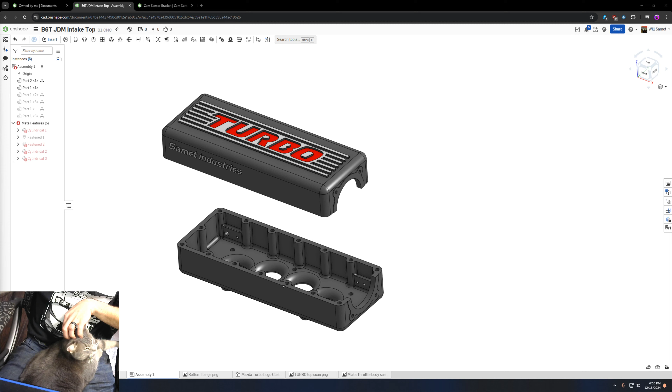What you guys can't see is just off screen... hang on, I gotta be able to see my own camera in real time here. What you guys can't see is just off screen, I have my kitty. Say... Salem. Hey. Where you doing, kitty? I have the heater on here. She loves the heater. So, oh, there's the purr. That's a good kitty. Oh yeah, look at the camera. So yep, we got Salem in here hanging out with us, along with all of you lovely people watching this on YouTube. Keep my face down here in the corner.

We'll go back to the actual part here. So there is my intake design. This is what we'll be editing today. We are looking to fit in our fancy dual sensor MAP and IAT sensor, which is over here.

So this is what we were talking about in the garage earlier. There is our sensor. This is a Bosch all-in-one manifold pressure and intake air temp sensor. It simply requires a hole to be inserted into and then a spot for us to secure it with a bolt, and that'll go inside this intake design somewhere.

For those who missed the stream in the garage, we were talking about the intake design. So here is the printed version. Switch back to my self-view screen here.

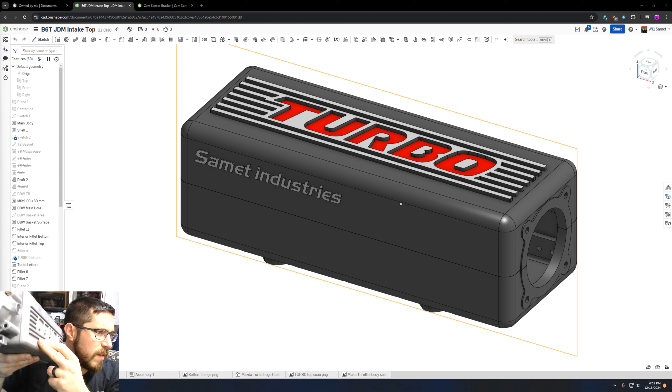So there are already holes. So there's the intake manifold printed. So that's what you're seeing on screen. You're seeing a 3D model of this. And then in my hand here, I have a 3D printed version of that same thing with our throttle body attached to it. On the back side, we have some ports available for vacuum reference.

So that is the thicker one that you run back to... sorry, I'm mirrored here. That's the thicker one that you run over to your brake booster. A small one for standard vacuum line for things like vacuum reference for the ECU or for the fuel pressure regulator. And then on the mirrored side, 3 more smaller ones for any other vacuum accessories you might need to add, like the factory distributor, vacuum for people still running the factory distributor, extra vacuum reference for any accessories that are vacuum driven, stuff like that.

There are other things you might need vacuum for. I thought, let's plan ahead and put in more ports we need.

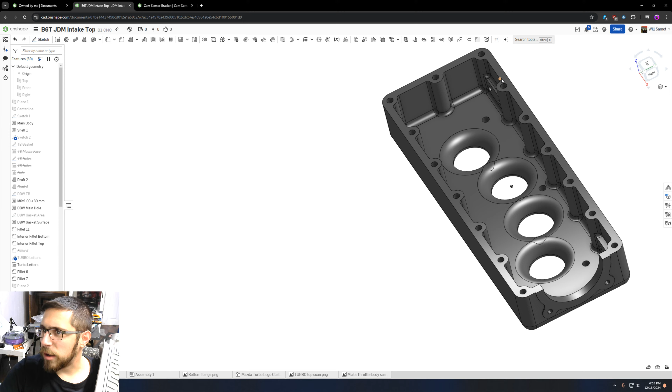So if we go to the model, I will open it up for you guys. And you can see there are those ports that we were talking about. So there's the big one and the small ones. You can see I've made this spot extra thick compared to the standard part. That way we could fully insert a vacuum port and not risk cracking it or having too thin of a wall. I made the walls nice and thick in those spots.

So basically what we want to do is probably move these components over or duplicate this whole thing on this side. That way we can still have our big vacuum port for our brake booster.

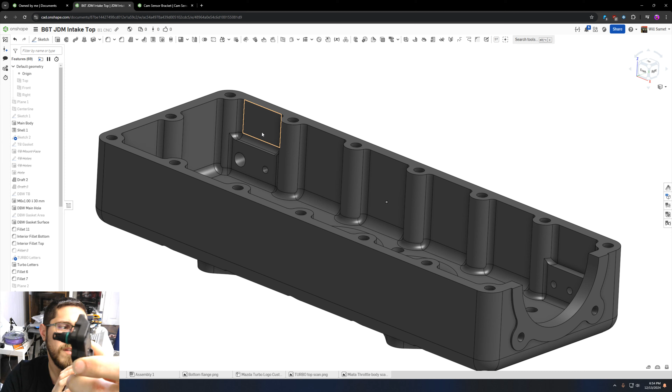Instead, make this block a tick higher and let this be the one for the sensor. Or make it a bit thinner and make sure the sensor actually fits through the hole. Because looking at the sensor on camera, you can see it doesn't protrude a whole lot. So if our design is too thick, this won't fit in the airstream enough to work.

So step one, we have to measure and half model this so we know where it fits on the design. Then we have to edit our design so this fits in place. That way I can have that done now before this goes to get machined out of a solid block of aluminum, as is the goal. I'll set that off to the side for now.

I guess step one, we need to measure some things. So I will get out our handy dandy calipers. Ooh, where are they? They're not in their case, where they should be. Ah, there they are, I got them out.

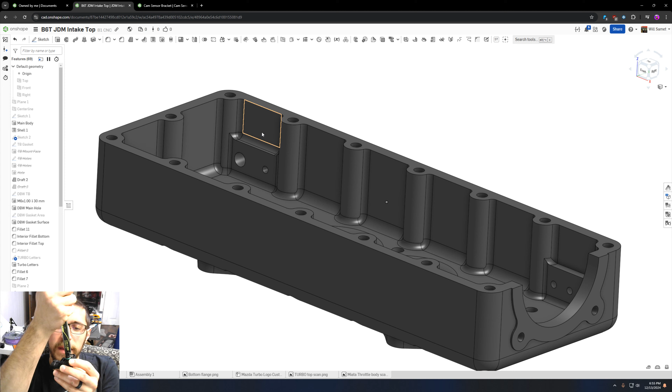Alright, step one, how big does our hole need to be for this device? It needs to be a 12 millimeter hole. How deep can we sense? I'm just going to measure how deep that is before it's considerably too thick. I'd call it right about there. So really about 11 millimeters, maybe 10.

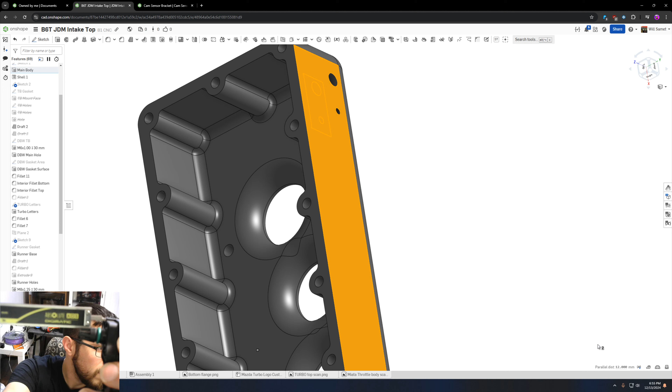And how thick is this? From here to here, we're looking at this number down here on the bottom, 12. So how thick I have it now would be almost too much. Let's see, what does 12 look like exactly? So 12 gets us right to the edge of that intake part of the sensor, right to those little openings, 12 to the base of this. So 12 might work, we might get away with that. Ideally though, we'd want it to only go through that top portion.

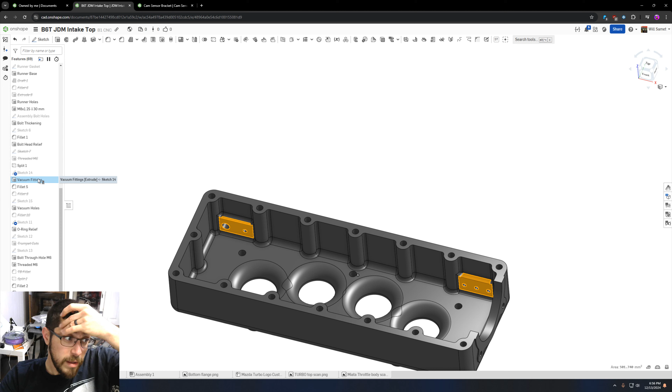So let us roll back this parts tree here. Where is this drawing at? Vacuum fittings - oh look at me being so good labeling my stuff ahead of time. Really thinking ahead here. Trying to find, there it is.

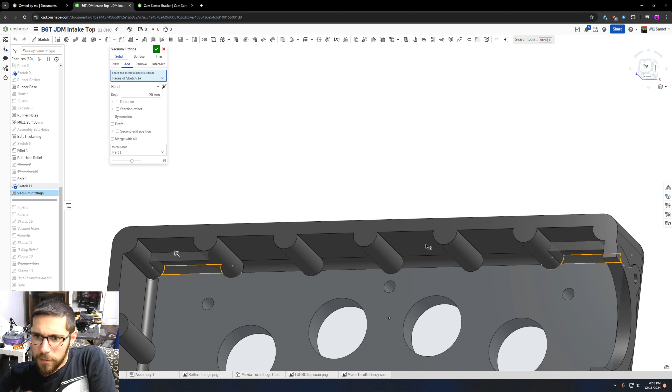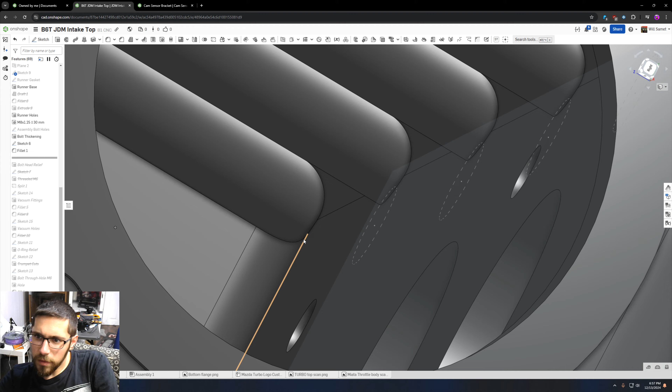Alright, so we can roll back our design to that point. Yep, that looks about right. Face of sketch 14, you say? That must be from these fillets. Oh, we can't see into it yet. So it looks like our fillet's already there, so that's fine.

Alright, this sketch is not defined currently. Can I just delete this dot? Oh yeah, look at that, sketch is now defined, great. Okay, so I just copied those sketches over, it looks like. So let's do that again, we'll just edit this sketch.

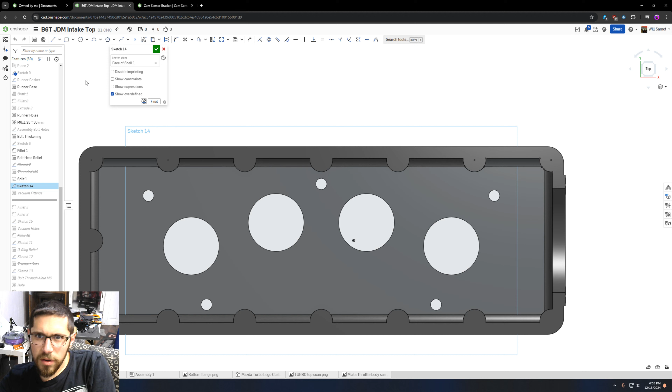Oh, I hear it sailing. There's a bug in here. Looks like a Kentucky state bird, aka the stink bug. It must be in here because it's nice and warm.

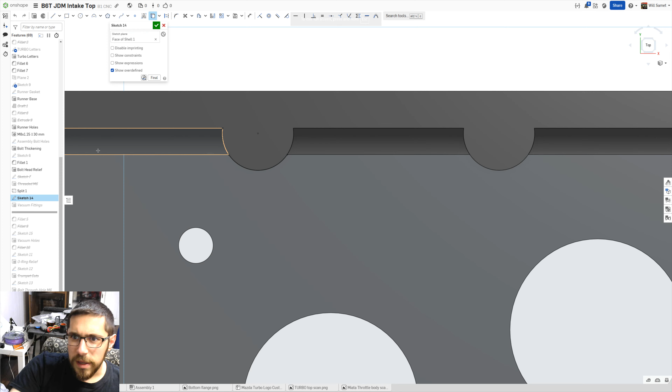Alright, since we're in, let's just full screen this so we can see what we're doing. Since we're in Onshape, we can quickly convert this entire shape into a sketch. That should carry it over to the extrusion. Fantastic, look at that, there it is.

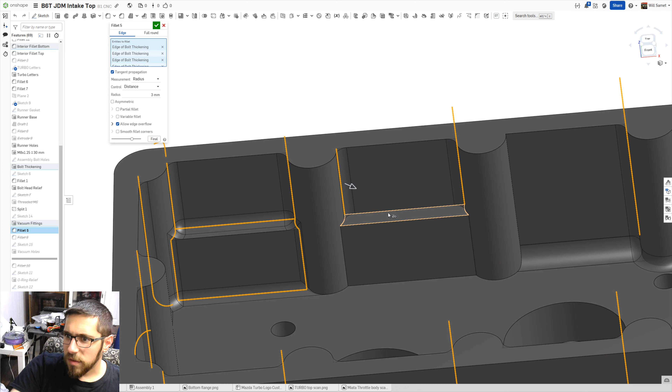And now we can fix all these edges. Want everything nice and smooth in here for our airflow, nothing needs to be messy. Yeah, that looks pretty darn good.

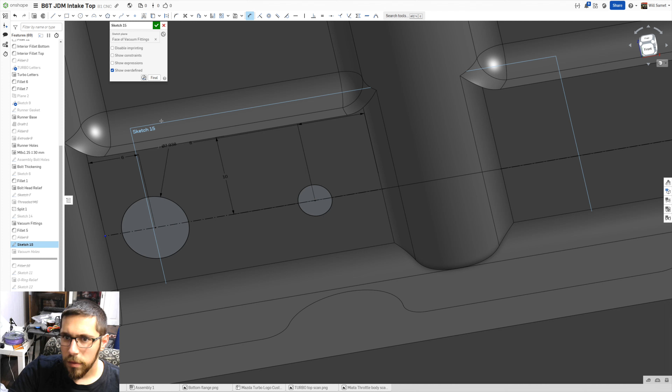Ah, we lost the reference somewhere. No worries, we can copy that over. Looking for 10 mils from here to here. And really, so we want this sensor on the back of the intake, we want it facing that way.

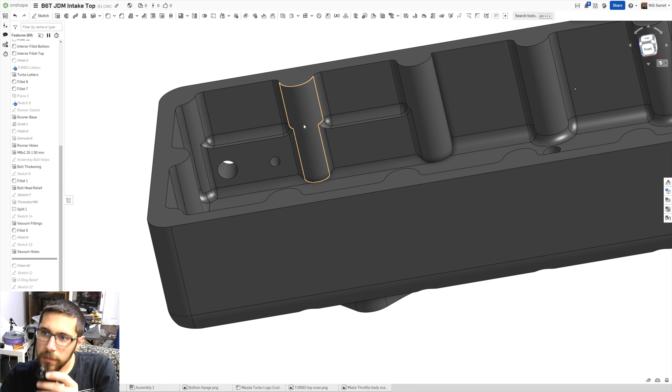So let's think how deep we really need this to be. Alright, so we need to get our center distance for the mount holes for this, so that we know how far we can go up or down, where we did those weird extrusion looking doodads.

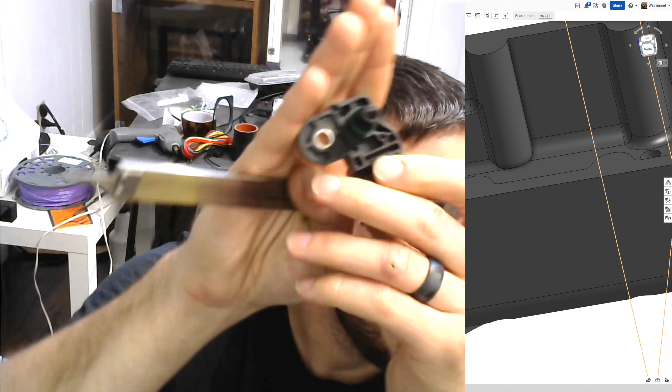And thankfully on this sensor, if I'm looking at this correctly, it has these two. Again, I think our camera is not great for you guys to see what exactly I'm doing. Maybe if I make myself bigger for a second in real life. So we have these two holes we're referencing: the mount hole and the hole we need to drill for the sensor to actually go in. Do you want to focus here, camera? Camera, you want to pick this up? No? Okay, great. So there's this hole and there's the sensor itself.

Now, the way Bosch has molded this, there's actually a nice little crosshair showing the center of that hole. And if you look at this piece here, there's a crosshair showing us the center of that hole. So we can simply measure across those two crosshairs and know our bolt distance, which is great news. Makes my life much easier that way.

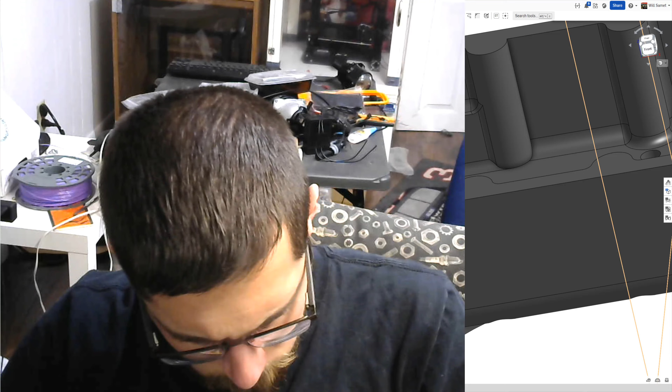20 millimeters. I love a good whole number. So let's take our vacuum holes drawing.

Let's delete these measurements, and let's try to stick these on the other hole over here. Because this has wires going to it, and I want the wires to be on the very edge so we can wrap them however we see fit, and then not get in the way of the other hoses.

Oh, the cat's grabbing my thing. Oh, sorry, I forgot to move my camera back.

Yoink. Alright, so we just move these over. How far, I'm not sure yet.

Same deal, we want to go for about here. That one was 10, and I believe this other one was 8 from the edge. Yep, 8.

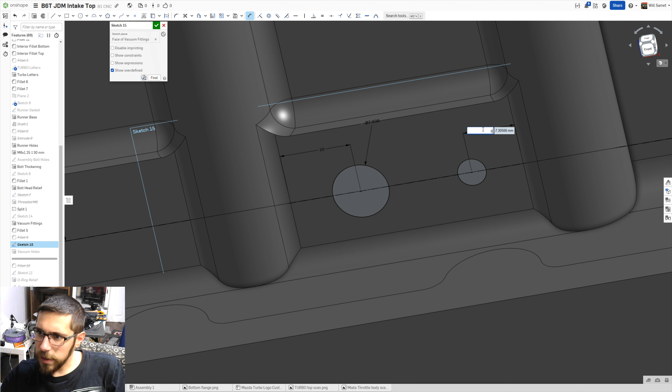Now for this guy, the flat part rests all the way up. So we need a 12 millimeter hole.

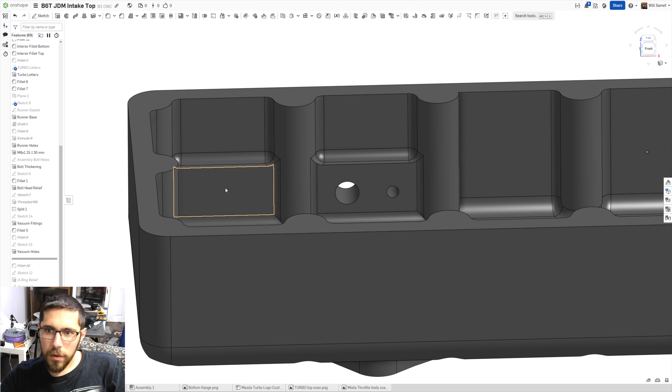Over here, and then 20 millimeters above that, we're just going to put a small hole for now, because we actually need to go through and make this a drilled hole here in a minute. But we already know that those have to be, first of all, vertical from each other, and second of all, they have to be 20 millimeters apart, center to center.

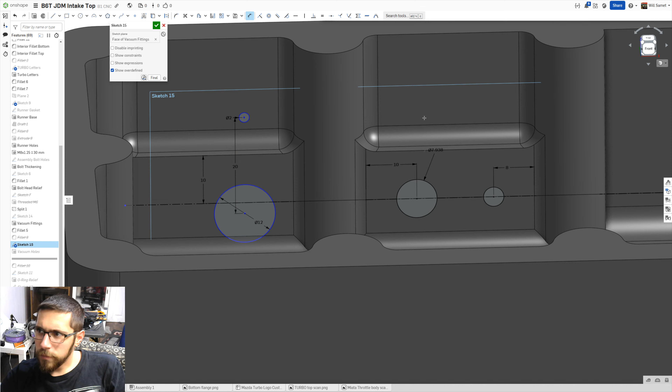Let's do a section. Well, not really a section view. We'll just keep working like this.

So I think we want to probably bring this whole face up so our bolt goes through a thick portion. And we'll probably end up chamfering this hole just to allow it to fully seat on all sides.

And we said that from here to here was 12, from edge to edge was 12 millimeters, and that just worked for this, so that should be plenty fine.

Alright, so let's take that center line. Let's say it's going to be... we'll call it centered, so we'll take that off. We will make that centered with this line.

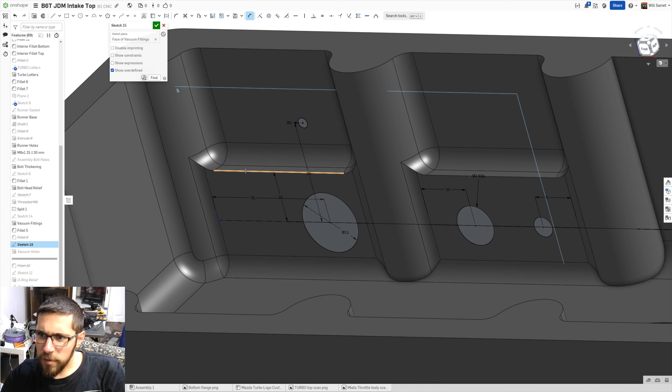Let's say 25 millimeters from the edge. No, let's go 20.

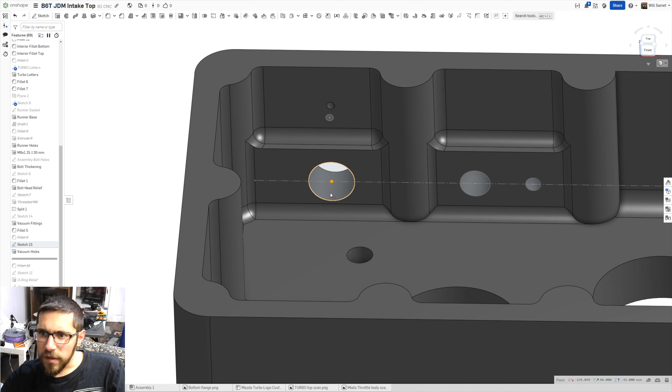Go back to that for a second. How far is this dot from this edge? In the X direction, it is 35 millimeters.

So I want to know that distance, because if we have this in the back of it, and we know that from here over is 35 millimeters, my question is, can you see the tip of my connector hanging off the edge of this assembly? I'd like this to be hidden. I'm trying to make all my wiring as hidden as I can make it. So if that's hanging off the side, that would be not ideal.

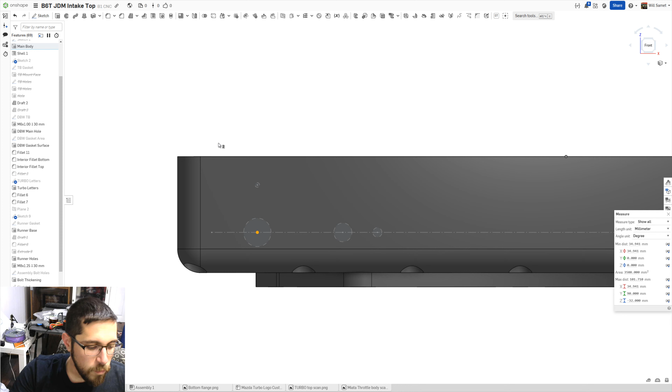It may actually be better in our case to make the connector face the inside. Our vacuum lines come off the edge like they were, straight back. The connector comes off the inside and goes towards the middle of the intake, where we actually have a hook to do wire management. So let's do that instead.

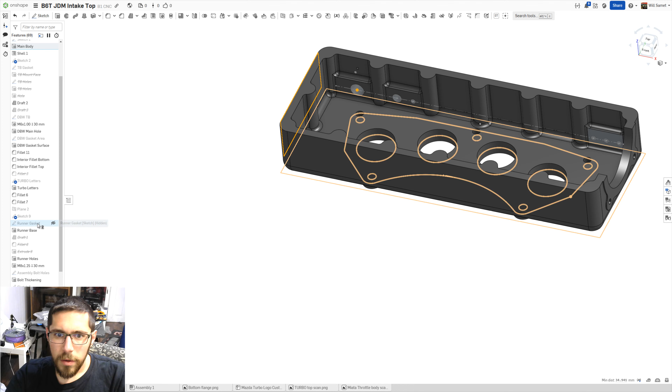Let's go back in here. We'll unmeasure this. Vacuum hole sketch.

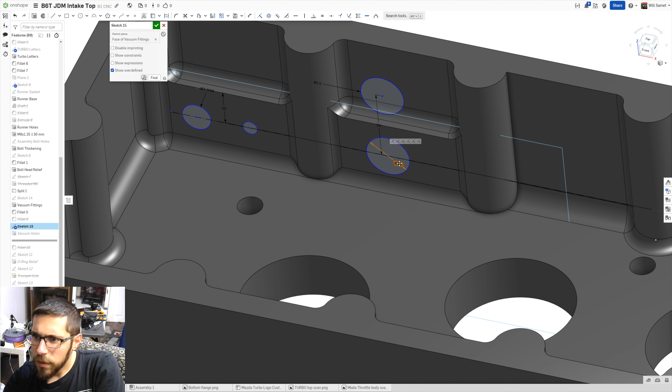Make this one 12. This one 2. Make it so it's not stuck to that edge. Oh, I like that a lot more.

Alright, let's do that. So now from here, let's bring it up. 4 mil.

Let's see what this would look like. This is going to be an M6 bolt, so it's going to be a 5mm hole. Make sure we have plenty of thread depth there, and we do.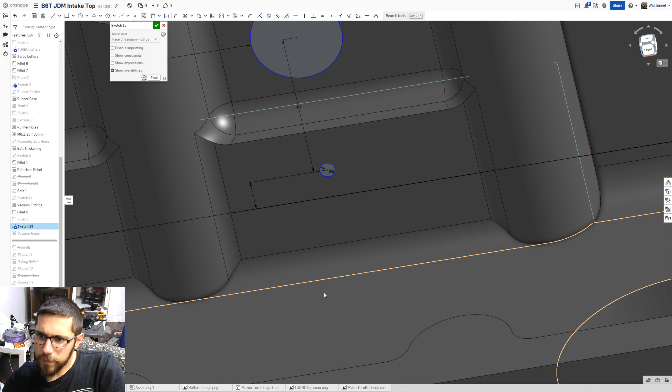Let's bring that back to 2 for now. Now with our sensor on the back side of that, facing the connector in, there's really nothing stopping us from any direction left or right, so might as well just center it.

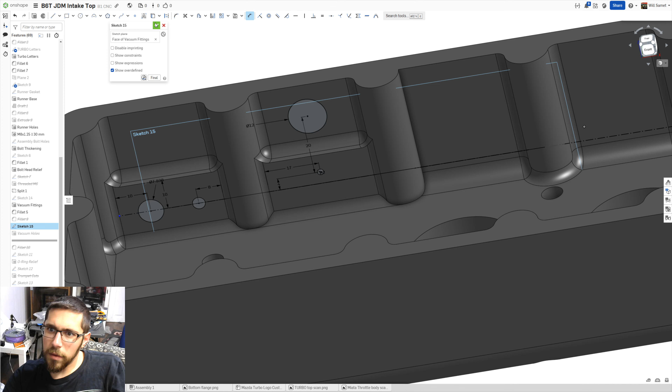And then this guy we had at 8, and from here we had it at 10. That's pretty good. Alright, so now this is where our sensor will live.

We still have our vacuum fittings. The sensor has more room to read than it did previously, which is great.

Let us bring it back to the full part. There we go. There's all of our fillets.

Can we fillet this line? Oh, we can? Well, that's just fantastic news. Let's do that. Let's make this intake as smooth as we can get it inside.

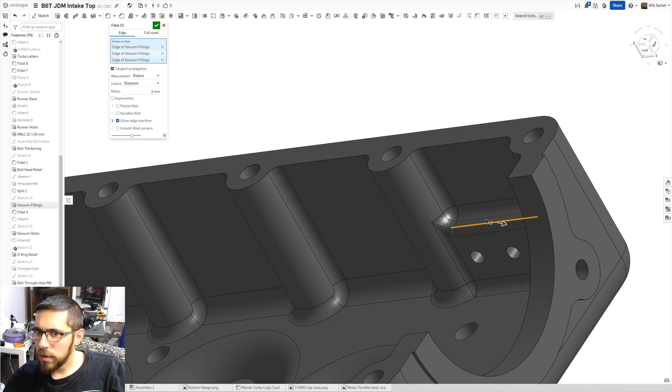And then we can use our hole tool. Let's see that sketch again. On this hole, we need a drilled...

We need a tapped hole. Straight tap is fine. Metric. Tapped. M6 by 1. Normal fit. Or we can say none. That's fine.

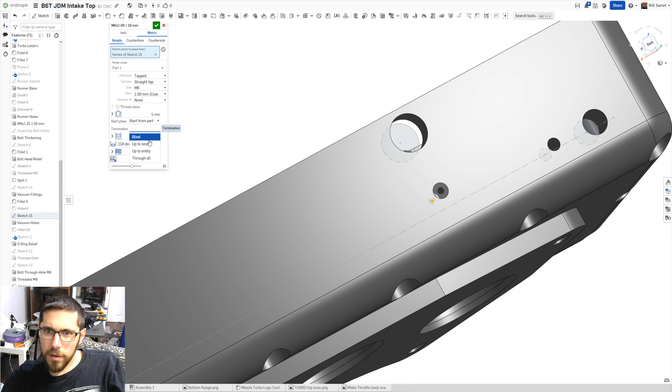So now we have specified that that's an M6 drilled and tapped hole. And then we can turn off our sketch view.

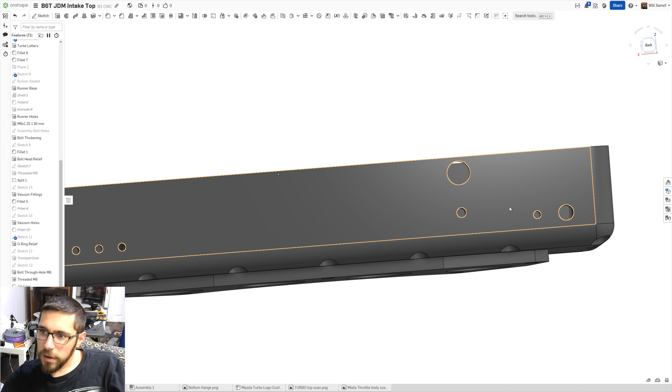Okay, let's think this through real quick. We've got our extra vacuum fittings. One for our fuel rail, which sneaks down to here. One for the brake booster, which goes straight back. Then our sensor will sit here, the plug facing left. Now I'm looking at it - that means the top of this will be above our part center line, which should not matter. The connector face is off the edge, so that should be totally fine.

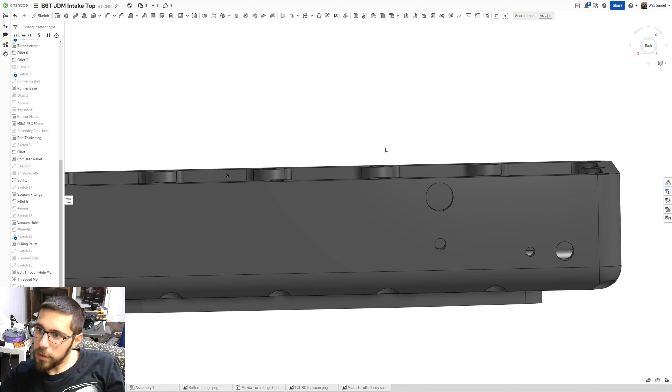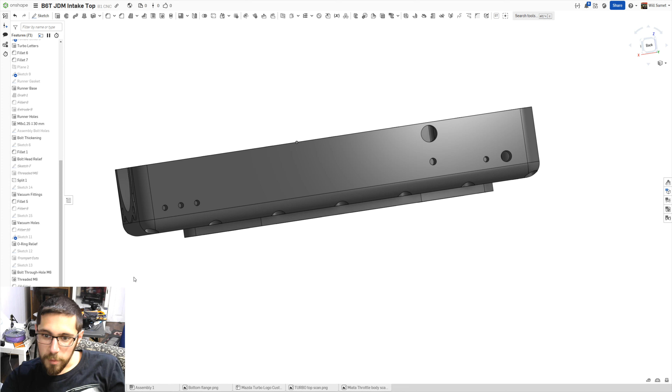And then our wire can come out from the edge of that, down, and right about here in space - there is a hook for all the harness for the injector rail and stuff. There's a spot to cable manage those wires, so we can drop that straight down, manage it here, it'll branch to the left and join up with our loom for our injectors about here, which would be totally fine. I can share the branch for the drive-by-wire even. Yeah, I like that a good bit.

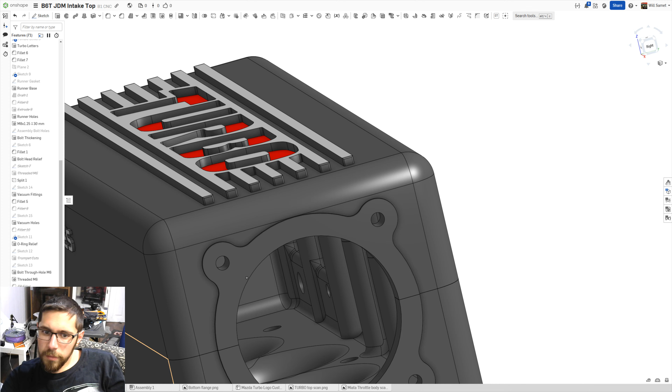Put our top back on. The only question then is this too close to the edge for comfort? Because we are also - well, one side gets the relief. The top side, yeah, top side gets the O-ring relief, so that might be alright. You know what, we have the space to bring it down, so maybe we should just bring it down a bit. I was worried about it hitting, like, the sensor, fouling on this stuff, but it'll read pressure just fine. Let's bring it down.

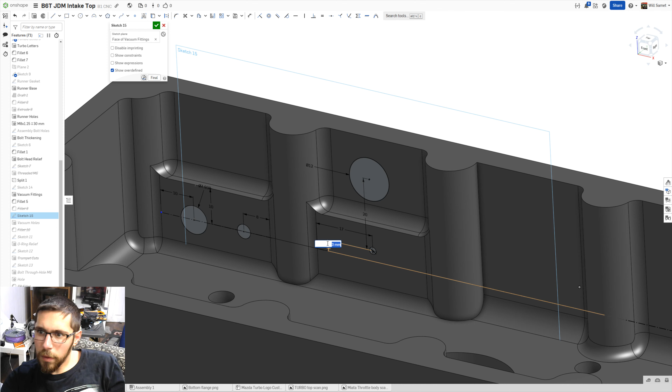So I wonder what's changing to make it look higher now than it was.

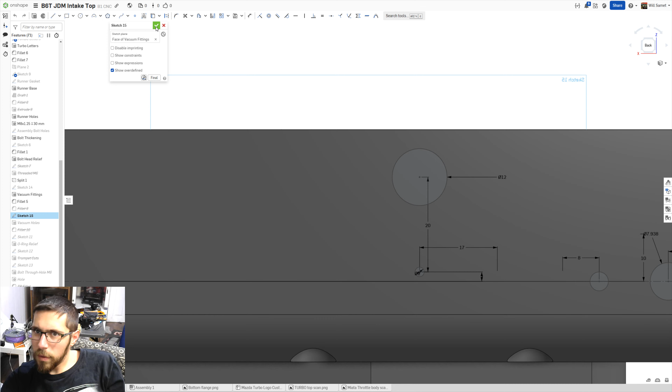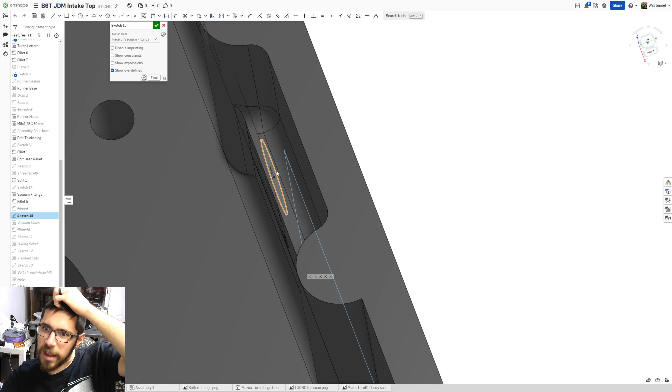Oh, I see what I'm looking at. So this hole is drawn based on this face. If I turn it some, you can see it's actually floating in the air here. So I was kind of confusing myself having it at this angle. It's actually floating away from that surface, so it's not that close to this edge like it looks like. That makes way more sense. I should have been looking at it from the back. Okay. No, that looks great.

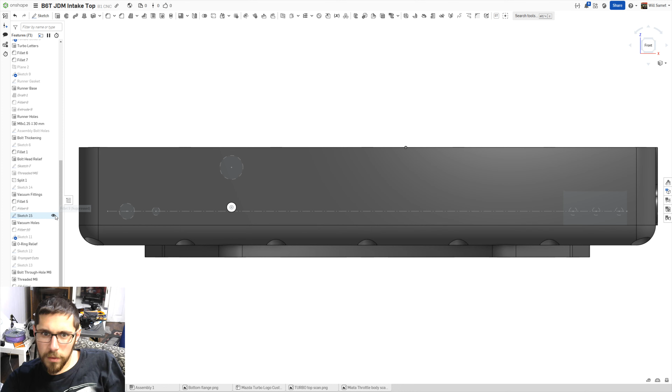Except I tapped that one hole all the way through. That would have been bad. That should be at least 15 millimeters. It's just past the thickness of the part. Alright, so there you go.

There was some CAD work, and now we've got a very nice looking part with room for our fancy new sensor.

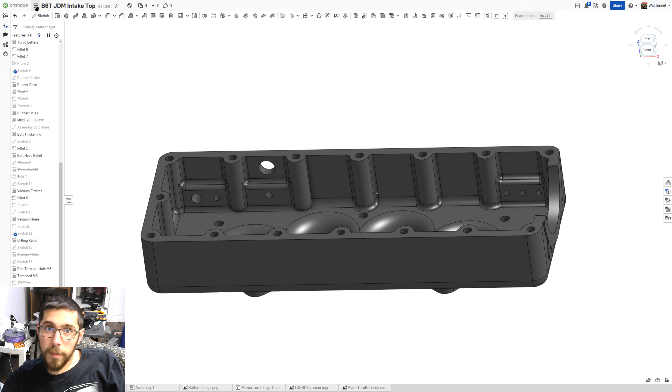So let's go back. Then leave this as is. That's basically ready for machining now as far as I'm concerned. And let's fix our cam sensor bracket. So this is the one we also checked outside earlier.

Oh, hi kitty. Yeah, kitty kitty. She just curled up in a little ball. She's taking a big nap. Big cat nap.

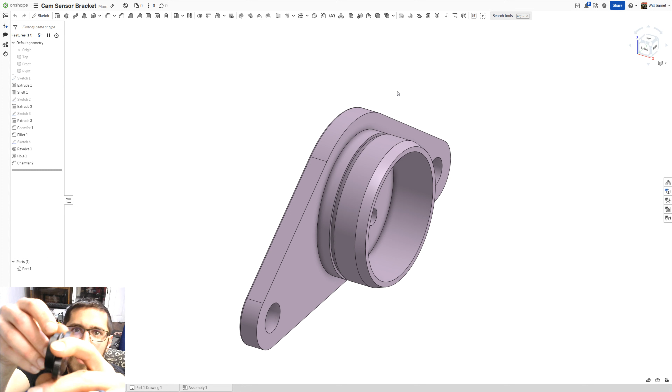Alright, so here was our sensor bracket that we were messing with in the garage as well. Again, it probably won't focus correctly, but our O-ring is not sitting in our channel. Our channel is way too thin for the factory O-ring size. I absolutely mismeasured that channel size. It needs to be way deeper. By way deeper, the exact depth would be the width of our O-ring in this case, plus a tick. So this O-ring is 3.5 mil, and I think my channel is 1.5. Yeah, that's way wrong. Okay, that needs to be like probably 3.6.

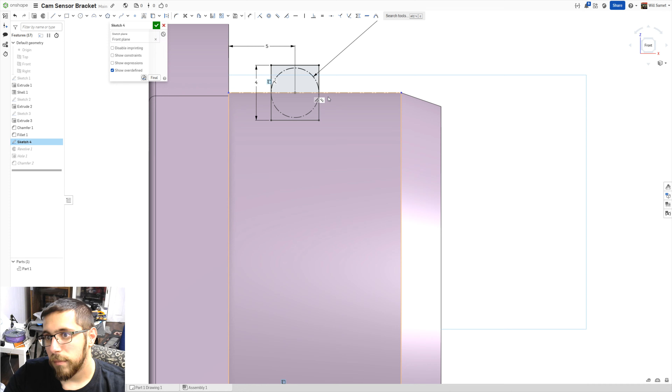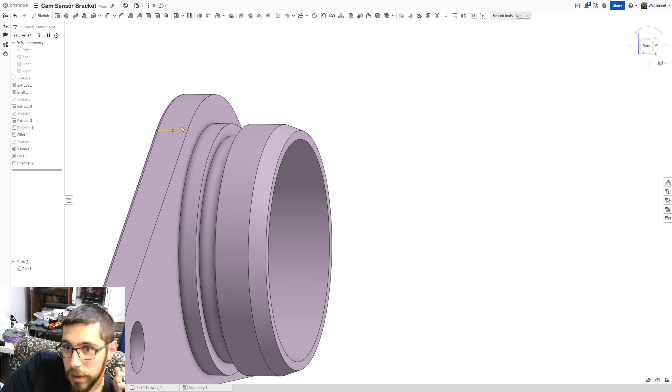This needs to be like 3.8. Maybe even 4. Point 2. No, we'll call it 4. Let's leave 1.5.

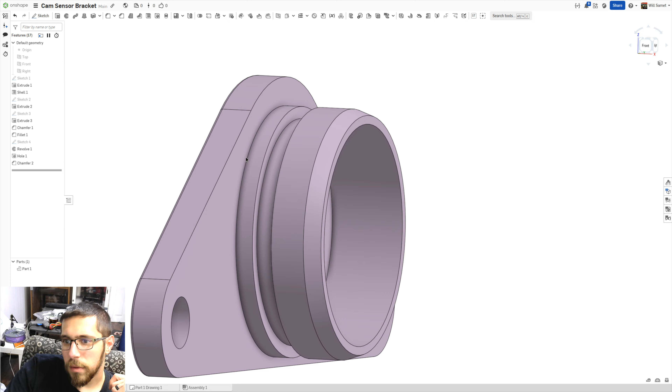No. We'll probably measure a factory distributor just to see how deep they're running that O-ring normally, before I get too crazy. Let's also make sure we're not cutting too deep.

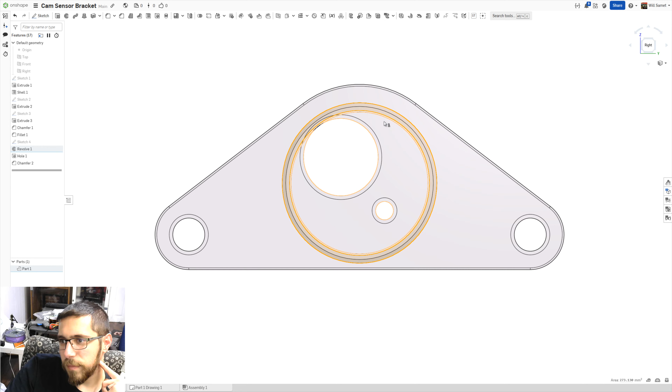Let's make this transparent for a second. Let's highlight this edge. Okay, that part gets way thin. We're gonna need to thicken that up. Otherwise, yeah, that's how thin it is right here. That's not gonna cut it. More like that's gonna get cut.

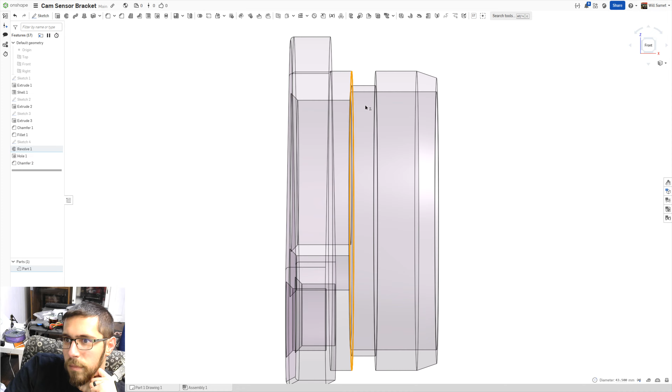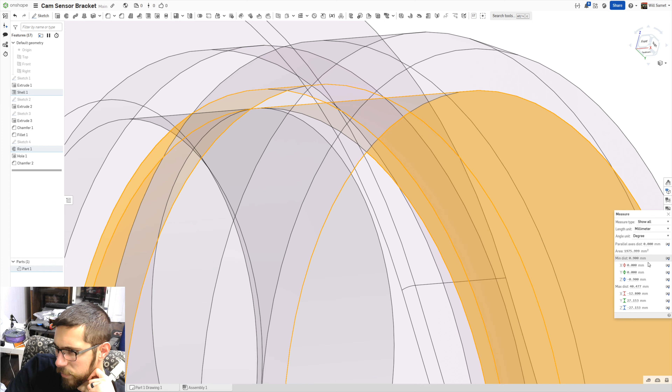Still a little thin. That's better. Alright, turn back to normal view.

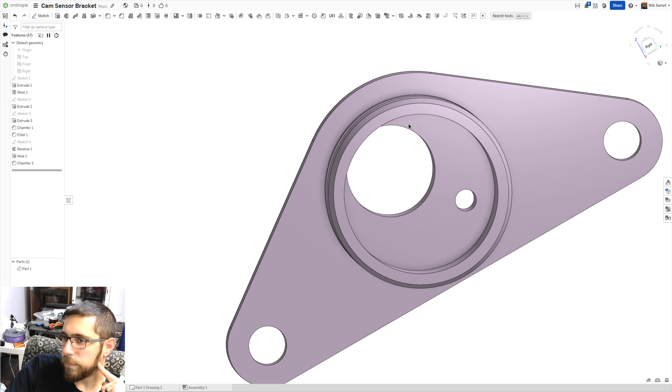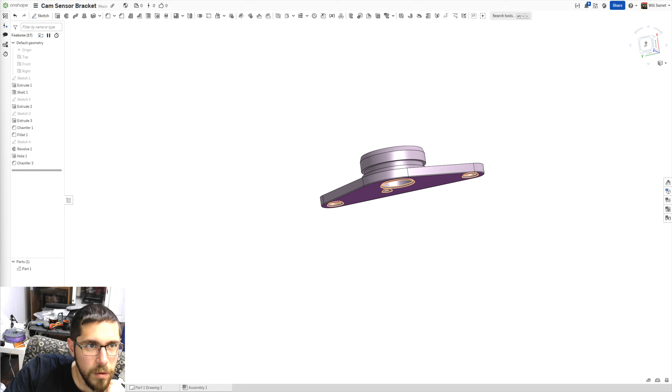Probably print one of these just for another test print, test confirmation, fitment confirmation, whatever the word is. Alright, let's check our printer. We need to start heating it up. The chamber is set for ABS. Here's our last test print. We'll basically run those same settings again for the new one.

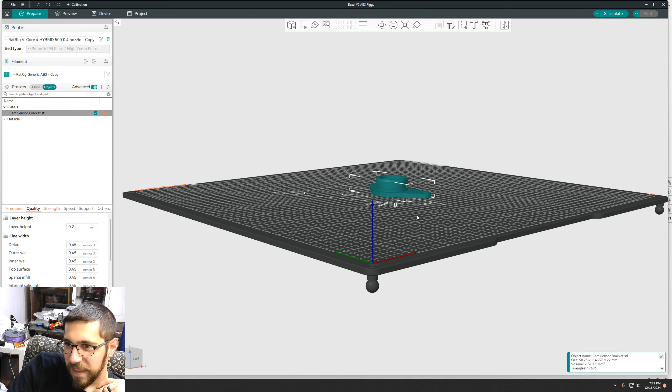John Galloway said, 'Man, this is way above my pay grade. Anyone else feel like they're in college or a tech school watching the professor at work?' I'm not that good, brother. Once you do it a couple times, it gets a lot easier. I was modeling stuff like this well before I had professional training on the matter, and now that I've had professional training, I only wish I had more, so I could do more complex and organic shapes and less parametric, very technical solid shapes like this.

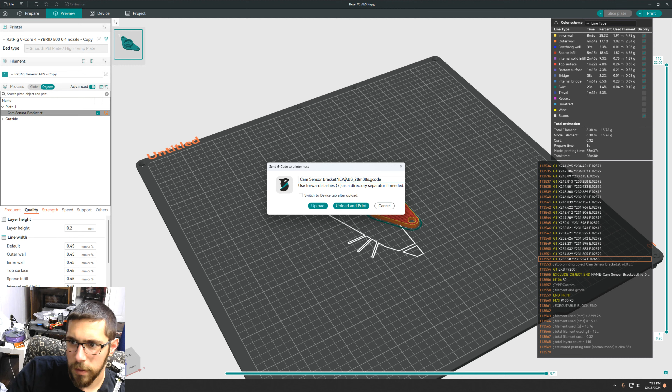Cam sensor bracket, new. Go ahead and upload that. Check on the printer here. I'll zoom in so you guys can see. So there's our temperature, right now we're just heating the bed. When the bed starts getting hot, that will heat up the entire chamber for the printer because it's like a 1200 watt heated bed. Once the whole printer's hot, ABS will stick properly, and then we can tell it to go ahead and print.

And there's the new one. So whenever we're ready, we can just click on that. It will show us a new picture, and it will start printing that.

Was there anything else we need to do while we're in here? I don't think so. Oh, we did need to format the SD card and set the clock on the ECU, actually, because we installed the new battery so that it would have a clock.

Dude, this cat is passed out right now. Let's go back to cat cam for a second. Don't tell her I showed you guys this, but oh my god, look at that. Look at this big thick kitty sleeping. Hang on. Cat cam, look at that sleepy kitty. Salem. Kitty. There she is, hi kitty. We'll give her some pets. Oh hi. Yeah, we'll give her some pets.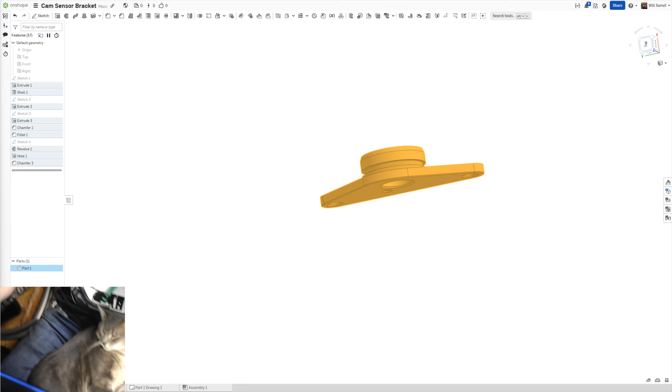Alright, fix that back to where it was. And I will find the right cable for our ECU, and we will do some ECU adjustments real quick, because that's stuff we gotta do on the computer, and we're here at the computer and not out in the freezing garage. So hold on little kitty, we're backing up. I gotta steal this USB cable because it's the only one I have that seems to work correctly right now, I was charging my phone with it earlier.

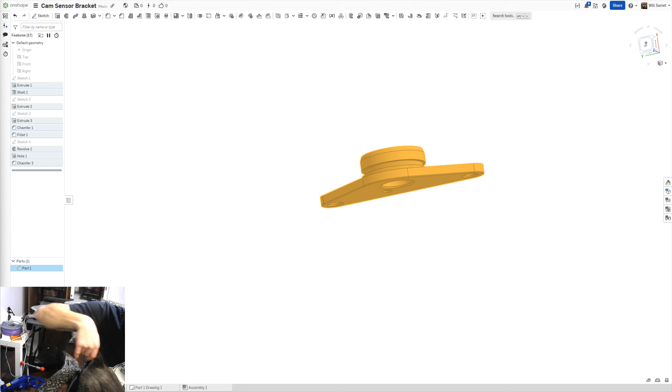Alright, coming back, just hold on little kitty. Oh, she's doing so good right now. Oh, I ran over something, it's making a lot of sounds. She's chasing it, what was it, say? What did I drop? A tiny screw. Wow. Alright, you come back now. Come here. Well, now that we woke her up, she might not stick around. She's purring though. She's absolutely chock full of purrs tonight.

Alright, so we will plug in the ECU again. Boop. There we go, there we see, we got some lights, we got beep-boop from Windows. This has a slot for an SD card. It's all based on the Teensy 4.1, which is a modern, very powerful yet very small microprocessor. This is actually, by definition, the fastest aftermarket ECU on the market because this thing runs at such an insane speed.

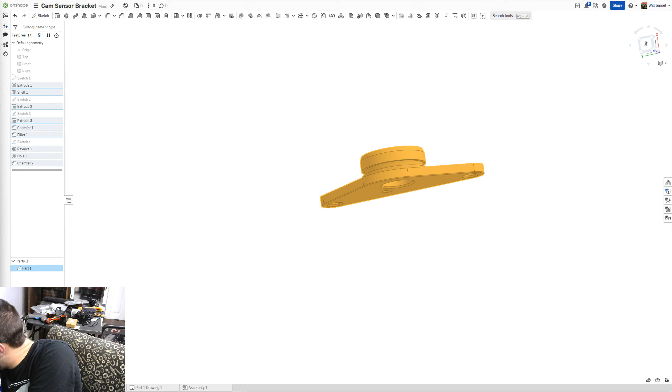Yeah, I know kitty. Alright, so we have our battery in, I've put the SD card in. Let's get it set up while we're in here, by in here I mean in the office and not the garage.

Hey kitty, where you going? Where you going? Oh God, oh God, help me, hang on, I gotta get the camera back over here. So she stood up and started staring at me, and that is because there's the bird, the state bird, it's on my shoulder right now. Sorry, look at that, it landed on me, I didn't even notice, but she did. Oh God, Salem, help me, it's getting me, don't let it get away. Salem. Help. Help me. Kitty, right there, get it, get it.

Oh, fat lot of good you are. Oh yeah, Salem, help. Salem, Kitty, look, it's on the back. It's on my back.

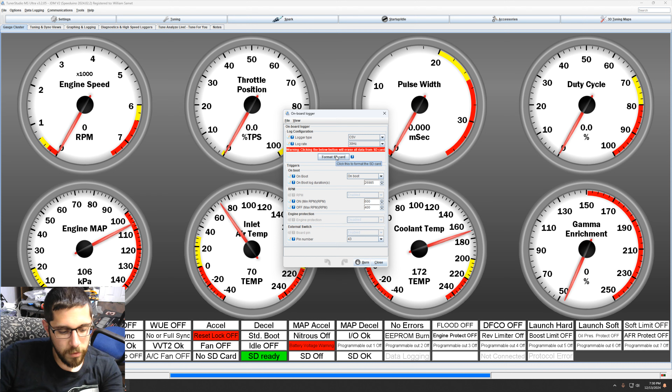Okay, I think that's it. I think our ECU is now set up to log correctly. There's not a whole lot of other stuff we can test on the ECU currently, sadly, because we don't have sensors available right now, as in I don't have a way to plug in a temp sensor or plug in our map sensor, for instance. Theoretically we could test this by plugging it into the ECU and reading some of these values, but I cannot currently. But this is where we'll be tuning later.

You see we have our spark tables here and our fuel tables. We'll also be doing flex fuel. It's hard to see because my screen is really dense—1440p screens do not work great with Tuner Studio. But so there's our current map. This is not really adjusted for anything, this is just a default map loaded in.

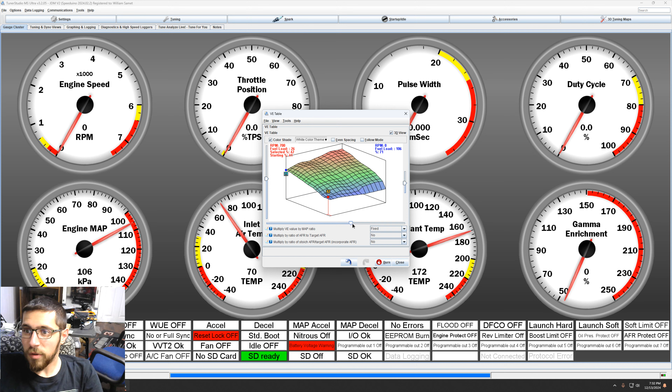I think this is a Miata map. I think I already put in a Miata 1.6 map, which is great. It's a great start for us to get our timing and stuff locked in. Well, it will need a lot of adjustments for us to get it where we want it to be. Alright.

That was actually a lot faster than I expected. Our stream's only been... how long now? 45 minutes? That was fast.

So yeah, that's actually all I wanted to do. It's going to take longer for the printer to heat up than anything. As you can see, it's only 34 degrees in there right now, and we would like it to be closer to 60.

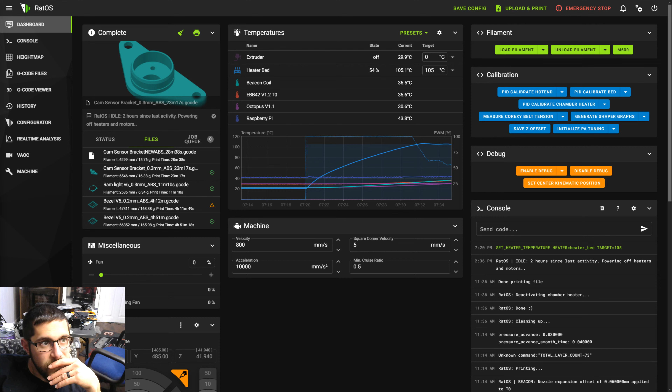At some point, I'll probably get a camera actually set up inside the printer so that on live stream we can see it printing. I think it's something that somebody suggested before, and I think it would be really cool to actually see the printer in action.